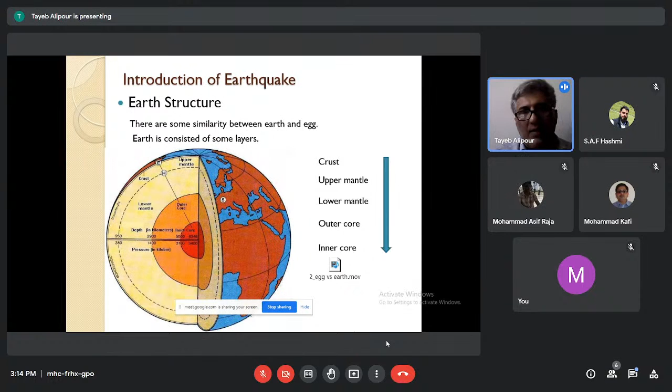In this slide, you can see the layers of the Earth with their materials. As you see, the inner core is solid, the outer core is liquid, then the mantle, and after that the crust. The crust is between the surface and 100 kilometers in thickness. You can see other depths such as solid and liquid layers - for example, 5,100 kilometers solid and 2,900 kilometers liquid. Anyway, this is the basic information.

In this slide, how do lithosphere plates move under the lava? It's simple - as you see, this is a flow under the lithosphere plates. There are two flows, in fact, on the right side and left side, both happening at the same time. When we have this situation, the lithosphere plates experience tension.

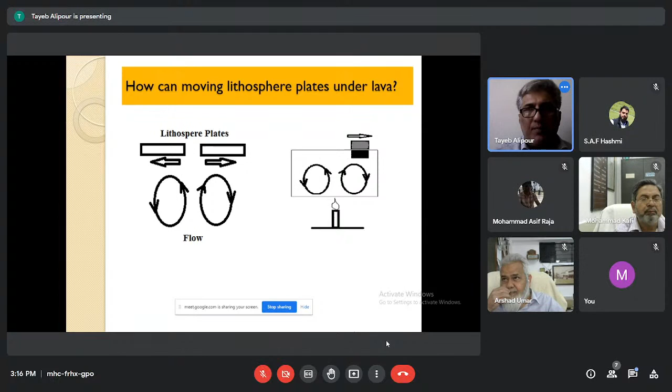In this slide, this is the tectonic plates of the world. As you see on the left side, America and Africa are separate at present, but 200 million years ago, both of them were face to face.

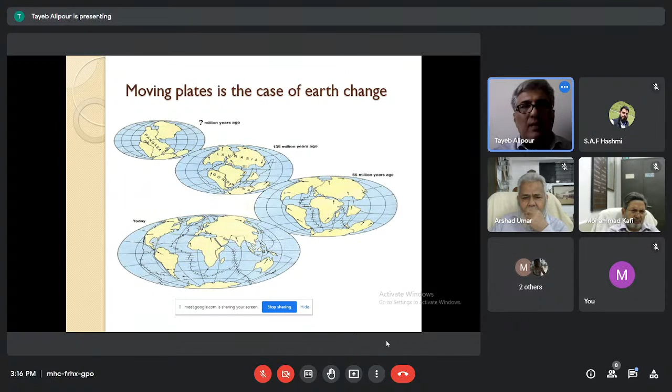Moving plates is the cause of Earth's change. You see on the left side, up to millions of years ago, all the continents were together. After 135 million years ago, there was a little change. After 65 million years ago, on the right side, it is similar to present. And today this is the Earth, as you see.

But what will happen in the next 100 million years? Definitely it will change again because of moving plates. So Earth can change.

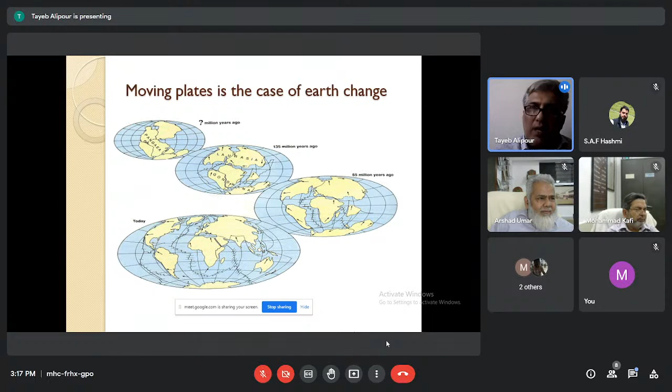So if you focus on Indian plates, it's under pressure.

Background of earthquakes in the world, 1980 to 1990. As you see in this slide, there are main earthquakes in the world during this time. The ring of fire is the main ring of earthquakes around the Pacific. Also, we have Atlantic and Alpide.

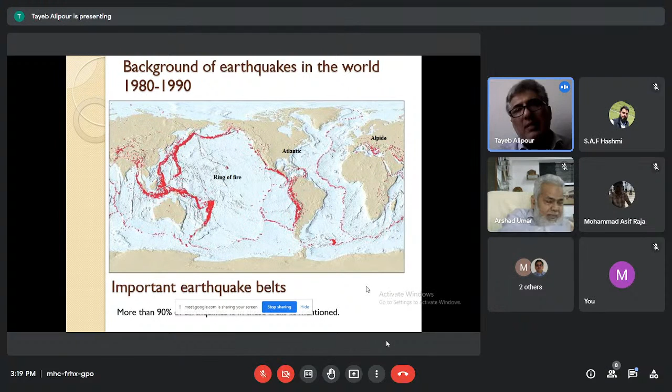In this slide, you can see the direction of Arabian plates towards Iran plates, as I mentioned previously, under pressure. Also, you can see Indian plate, same as Arabian plate, both under pressure. As I mentioned, Indian and Arabian have the same behavior for tectonic plates.

But you see Turkish plates are under tension. It's actual—when you have pressure, you definitely must have tension in order to balance.

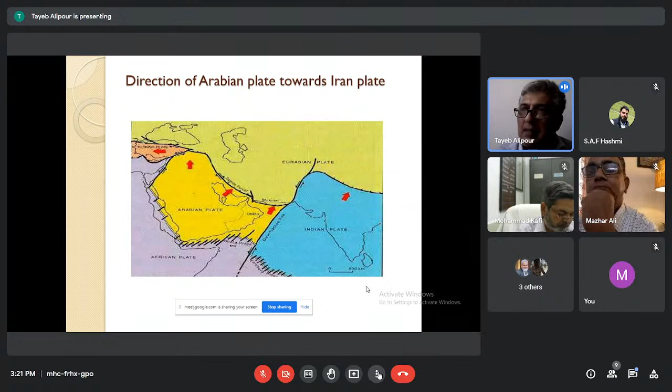Type of boundaries: divergent with extensional behavior, convergent with compressional behavior, and transform with shear behavior. As you see in this slide, left side is divergent and right side is convergent. And after that, transform is possible to see under shear behavior.

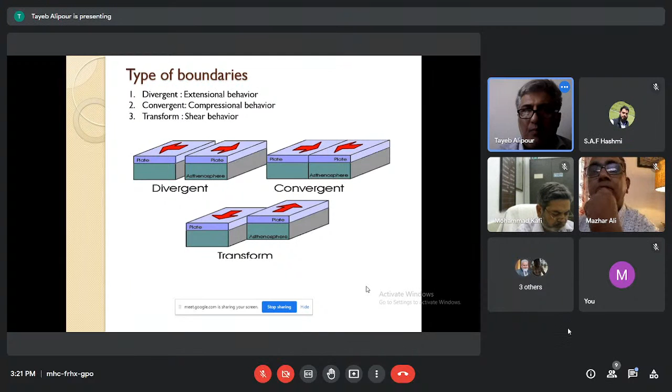There are a lot of movies, but we don't have time because more than 168 slides are possible to present in this time. So I can share this PowerPoint and you can see all of the movies at your home and your university.

Shallow earthquake. As you see, tectonic forces are under tension, and normal faulting you can see in this slide, and transform fault in the ocean. Shallow earthquakes: tension and normal faulting at divergent boundaries, strike-slip at transform faults for lithosphere and other layers.

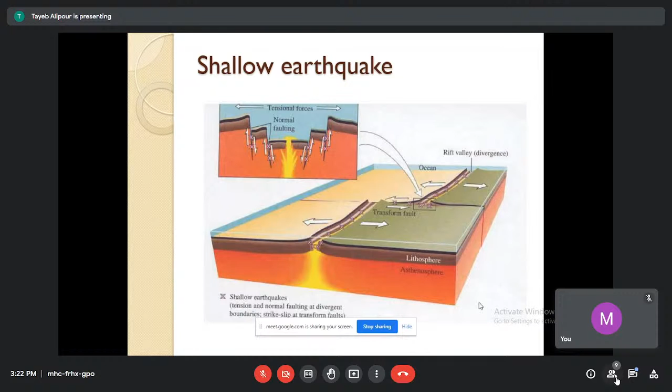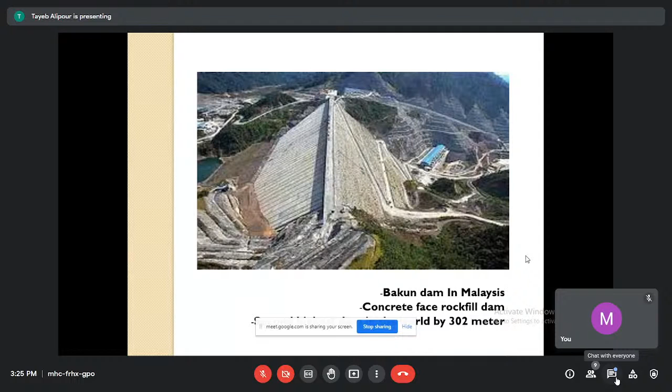In this slide, you can see Bakun Dam in Malaysia. It's a concrete face rockfill dam, and it's the second highest of this type of dam in the world, at 302 meters elevation. It's in Sarawak, Malaysia. And in this area we also have peak ground acceleration, which is under my study, as I got it in 2012.

There are some photos about the failure of earth dams and some cracks, as you see in the next slides.

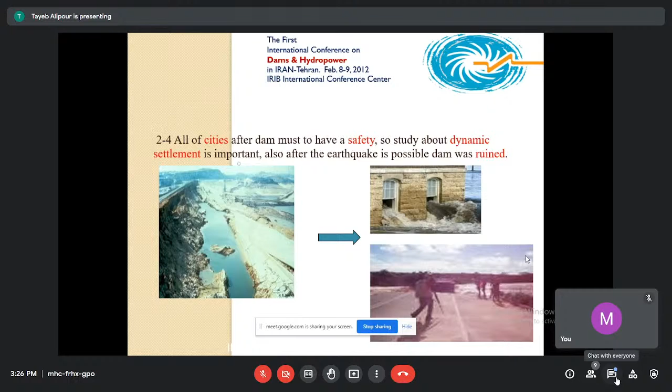This is one example about dynamic analysis, and I use in this study ANSYS software. You can use ANSYS in terms of finite element, or ANSYS Abaqus, and in terms of finite difference, you can use FLAC program also to analyze dynamic analysis of earth dam.

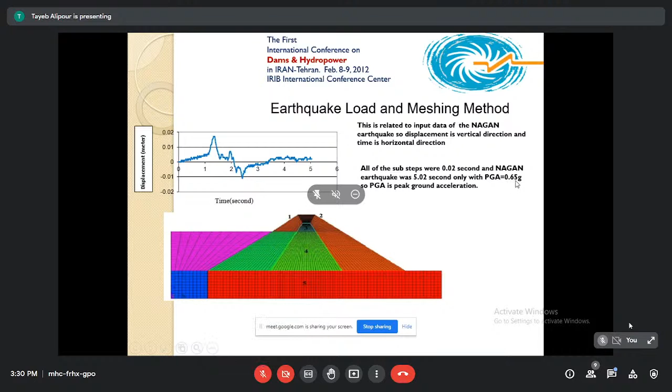Also, observation of performance of a dam during the 2013 Grassmere earthquake. As you see, upstream and downstream, exactly in this area, and at the crest, you can see a lot of long cracks.

Also observation of cracks, next slide. You can see the various damages during head water on the upstream, because this is dynamic pressure and not static pressure. When you focus on dynamic analysis, dynamic pressure of water is so important on the upstream head.

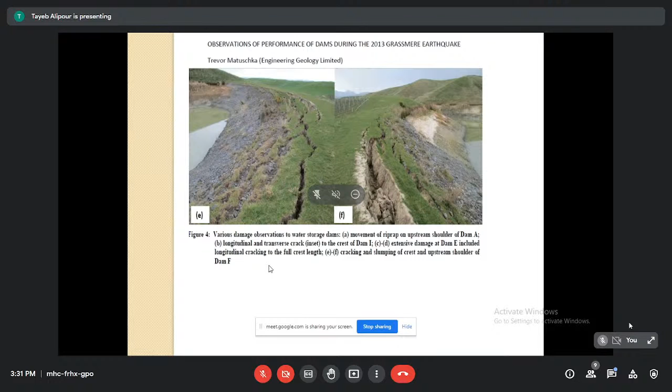You can see here Tappar Dam displayed longitudinal cracks at its upstream during the Bhuj earthquake in India. Lateral spreading zone at the downstream of the Kaswati Dam.

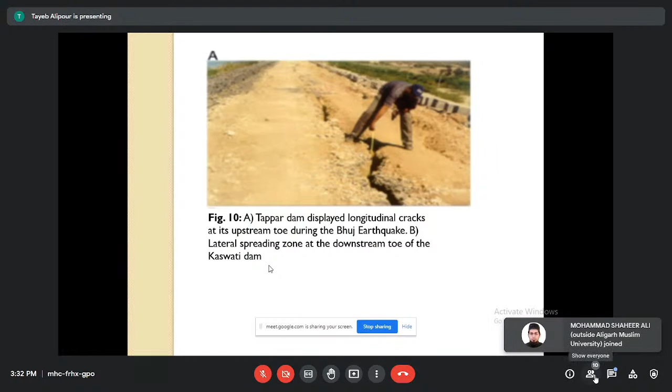Excuse me, do you have my voice? All right, because I was worried there is nothing. Anyways, I will go on.

You can see the concrete slab dislocation, the Zipingpu Dam during the Wenchuan earthquake in China. This is one of the concrete face rockfill dams. After this earthquake, you can see long cracks at the slopes.

You see the settlement exactly at the middle of the crest in the Zipingpu CFRD, as reported by Xu Zeping in 2008.

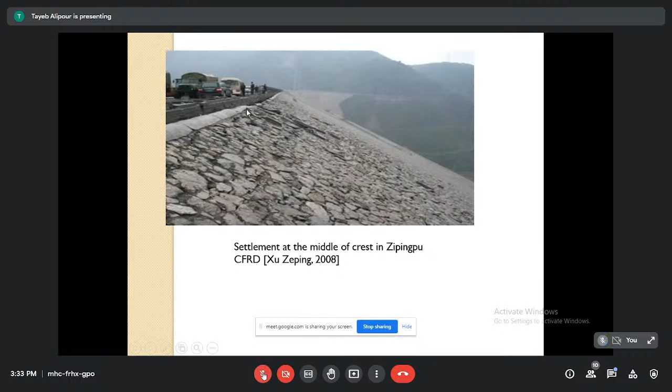Do you see my mouse, Professor Bilal? Yes. Okay, because as you see, this is the middle of the crest, and the settlement is maximum exactly in this area.

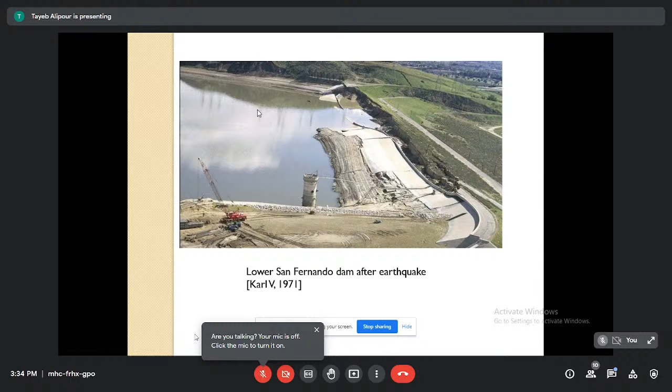So what happened? What should we do? There are some options to select. Just wait and go on, we can explain step by step.

So in Los Angeles Dam, also a concrete face rockfill dam, after the Northridge earthquake in 1994, reported by Robert, there are some cracks.

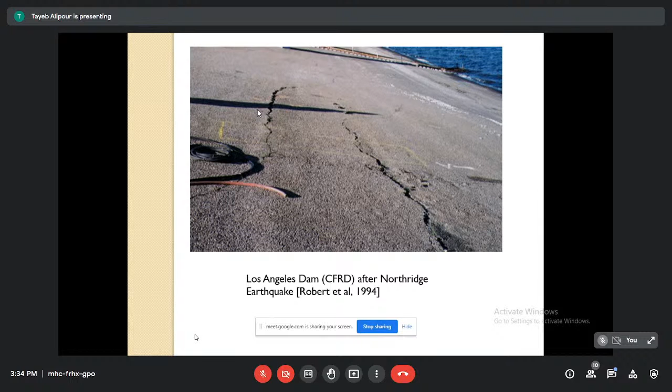Why? Because displacement at the crest is maximum, and shear stress of the soil is 0. Shear stress in an earth dam is maximum at the base, based on soil dynamics and soil mechanics knowledge. Shear stress plays an important role on dam behavior during an earthquake, so when you have minimum shear stress at the crest, it's natural to have cracks and maximum displacement.

As you see in this slide, the cracks are wide, and after that, it's so hard to process a repair. For repair, I will explain next how.

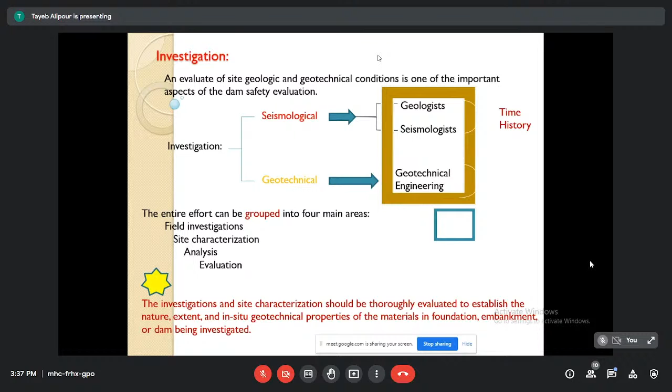Anyways, regarding hydrodynamic effects - to include earthquake-related hydrodynamic effects in stability analysis of water-retaining dams, the hydrodynamic pressure, delta PHD, below reservoir water level may be estimated from the following, Zangar 1952. You can see the formula, and you can see the charts, Y over H, and the pressure coefficient, as you need to calculate delta PHD.

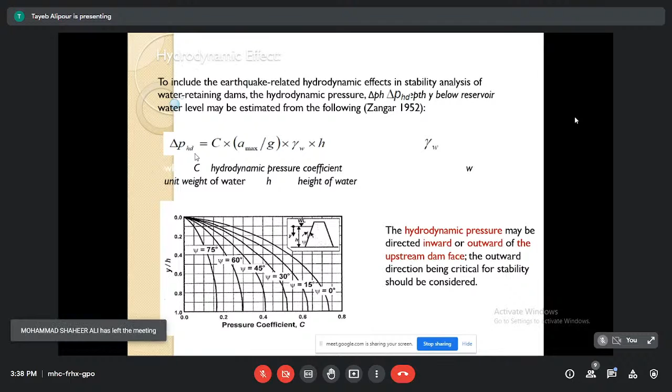The hydrodynamic pressure may be directed inward or outward of the upstream dam face. The outward direction, being critical for stability, should always be considered.

In this slide, you can see the time history analysis of Bakun Dam. As I mentioned, it's in the east of Malaysia, Sarawak. On the right side, there are two maps. The first one is the peak ground acceleration, or PGA, map for 500 years in Malaysia.

This was related to my supervisor, Professor Azlan bin Adnan, because he was an earthquake engineer. He also made, in 2008, a peak ground acceleration map for 2,500 years. So you have three colors here - green, red, and blue - with different PGA values.

This is the Bakun Dam in the middle, and this is the meshing of the concrete face rockfill dam. This is the aggregate rockfill, and the face is concrete, and this one is water.

So when you want to model this type of dam, you must be careful about the interface between the rockfill material and concrete, and between the concrete and water. You need to make interaction effects.

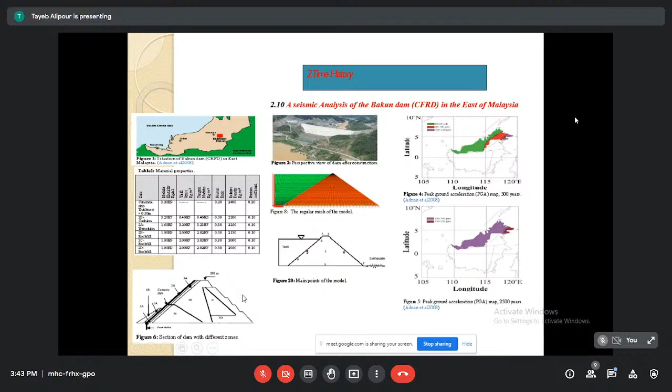For time history analysis, I used 3 records - figures 9, 10, and 11 - with different time and different peak ground acceleration. I used 3 earthquakes.

So you can see at different key points horizontal displacement and vertical displacement, and shear stress and shear strain, in order to consider the behavior of the dam during an earthquake.

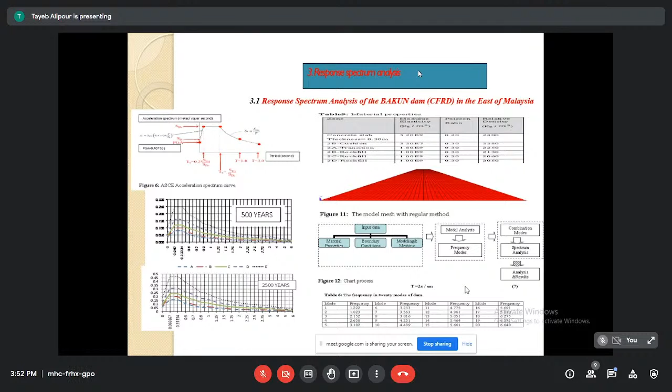Very good slides. Do you have my voice? Sorry, because I worry sometimes. Mr. Balal, do you have my voice? Yes, Professor, it is available. All right, thank you so much.

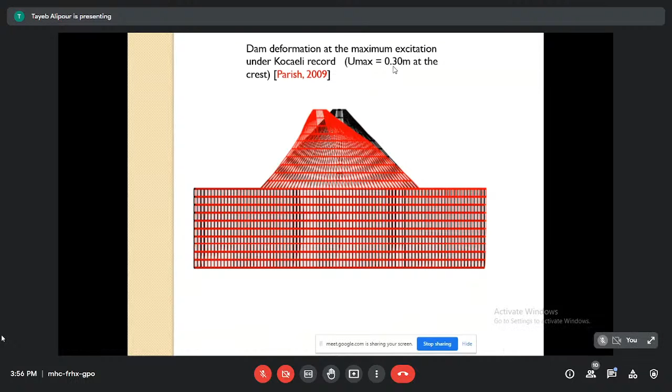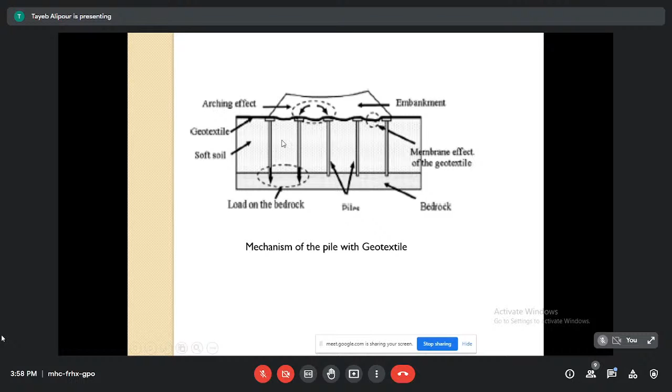Also you can see cases of the shaking table test as used for small scale modeling by Matsumaru 2008. For small scale modeling, you need to have a shaking table or centrifuge device. For my PhD at University Technology Malaysia, I used shaking table test for small scale modeling. Next, I'll explain a little about my method to remove these cracks at the crest and upstream during an earthquake by using the IDL material. What is the IDL? I'll explain in the next 2 or 3 minutes, maybe next slides.

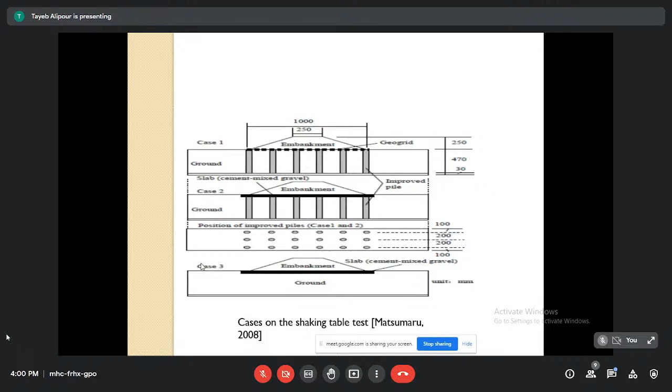Generally damaged. Anyways, these are some examples to show you, and you can see the primary centrifuge test, Wang 2011. Also I had one supervisor, Professor Dr. Rajiv Kumar from India, 2010.

Unfortunately, I lost contact with him because his contract finished at UTM, and after that I worked under Professor Azlan bin Adnan in UTM. I have no contact with him because he's not on Instagram, not on LinkedIn, not on ResearchGate, and I just have a connection by mailbox, and the last mail was 4 years ago. I am so worried about him. He was very good, very good - he had 2 postdoctorates, one in Korea and second in United Kingdom, Leeds University I think.

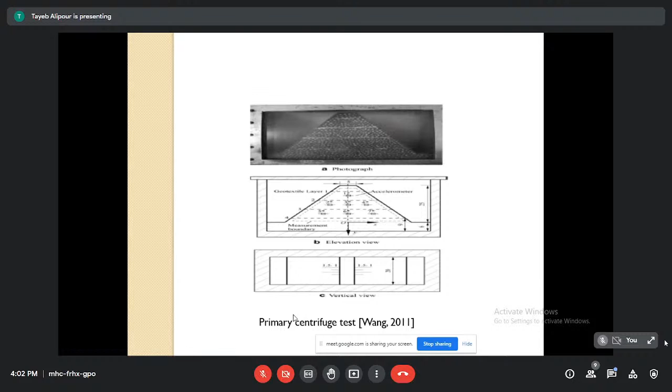earthquake. So I put this slide because I want to explain that when you want to focus on dynamic analysis of earthquake, you must focus on what time earthquake is occurred on the dam: during the construction, after the construction, the first reservoir, and after consolidation. Maybe 20 years after dam is constructed, you have earthquake. What's happened? Definitely your dam is consolidated, and this condition should be put in your model.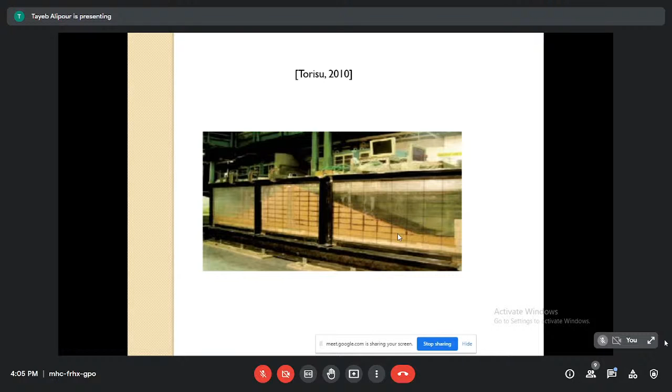Based on your option, you must put input data inside the software program. Please be careful about that.

And you see some shaking table test here. After the formation, you see the C condition, D condition, A and B.

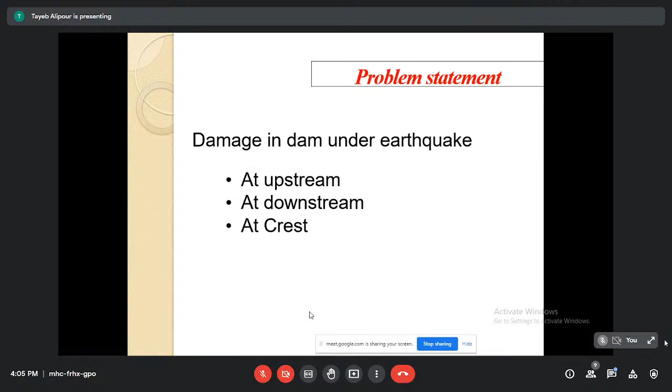Damage in dam under earthquake is a problem statement, and it's possible - damage is possible at upstream, downstream, and crest. Based on the literature review, there are some main notable words I want to share with you.

Acceleration is maximum at the crest. Maximum settlement is in the middle of the crest. Interface is very important for analysis. The amplification procedure related to the soil properties is very important - in fact, this is site response effect. And the valley shape affects dynamic analysis 2D or 3D.

So valley shape is so important. When you have U shape, it's better to make earth dam because you can use 2D conditions. And when you focus on 2D conditions, it's so simple for your PC to solve the problem by finite element. When you have 3D conditions, it takes a time.

Maybe you must use a huge PC to solve this problem. But when you need to use 3D, when your valley shape is V shape, in fact this is 3D. But when we have V shape, generally we focus on concrete dam, not earth dam. When we have U shape, river is U shape, so it's better to make an earth dam because of economic reasons - soil is so cheaper than concrete, as you know. So for earth dam, if we have U shape, it's 2D, and if we have V shape for river, we must use 3D analysis.

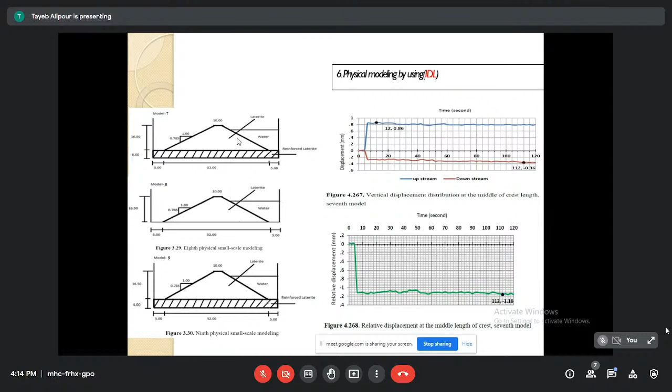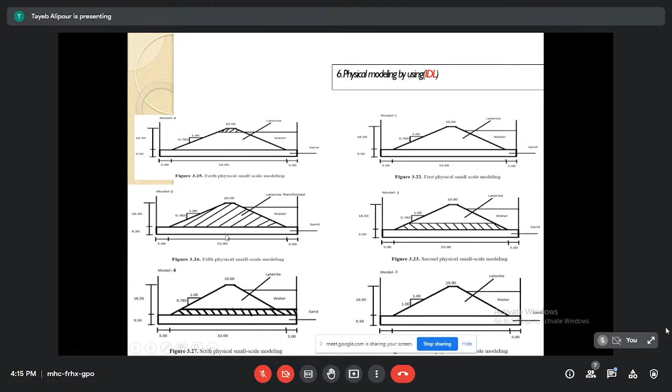Also I used different models. For example, in this slide you can see all of the body used IDL, but it was not good in terms of results because I had cracks again. As I mentioned, model 6 was the best result.

Anyways, after all, I think I have just 30 minutes, maybe 40 minutes, am I right? Yes, yes. I must finish and go very soon because I have a lot to cover.

This time I want to focus on guidelines for seismic design of earth dams and embankments. It's for India, exactly, GSDMA, which you can download. I recommend you read it carefully, step by step. This criteria is one of the best in the world.

So you can see the general scope. This criteria is related to the Gujarat State Disaster Management Authority, August 2005, revised May 2007, and reviewed by ICOLD, the International Commission on Large Dams. It consists of guidelines for earth dams built with small to moderate size embankments according to Indian codes, IS 11223-1985.

Defensive design measures, as you see highlighted in red because I had no time, it's possible for you to download and read it carefully. Deformation, overtopping, cracking, filter materials are so important for design. Filter materials, filter layers, near-vertical chimney drains are very important, and minimizing saturation of materials is important.

Wide impervious cores for plastic deformation, well-graded core and uniformly graded filter materials are important. Large slides into the reservoir are important; stabilization of reservoir rim slopes to provide safety against large slides into the reservoir. Ground improvement or removal and replacement of foundation material, as I mentioned, to mitigate liquefaction potential is so important. Stabilization of slopes adjacent to operating facilities to prevent blockage from slides associated with earthquake and flooding. All of these are important.

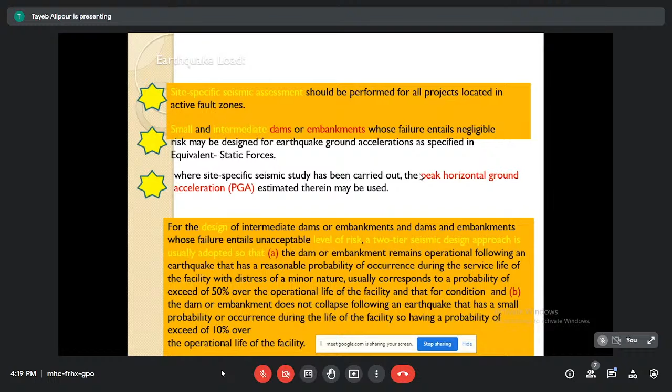Also, about site-specific seismic assessment: small and intermediate dams or embankments, and peak horizontal ground acceleration. You can find a lot of good information in this criteria. This slide is repeated, I think I explained it last time.

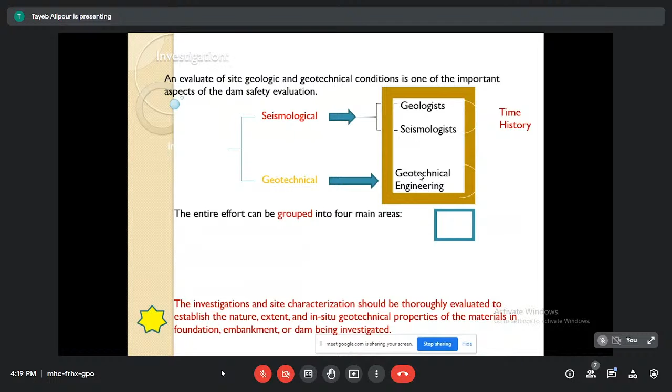Surely, geotechnical engineering investigation should focus on topics including topographic conditions, description of geology, composition and structure of foundation soils from the borrow area and bedrock, principal engineering properties of the rock and soils including grain characteristics, plasticity, compaction, characteristic shear strength, and hydraulic properties. Geotechnical investigation would typically include drilling and sampling, in-situ testing, SPT and CPT.

About location, this structure should not be constructed near the fault. In fact, near the fault, it's so important - you must avoid constructing earthen dams near the fault. If you want to proceed, you must improve your soil by different options, as I mentioned: using geotextile in different layers to increase damping, using piles with caps to absorb energy before it transfers to the dam body. So you can use different options, but this criteria tells you that this structure should not be constructed near the fault. Near field earthquake is when you have a hypocenter, the main point releasing energy of the earthquake, and this point has a distance from the surface. If this distance is less than 15 kilometers, it means near field earthquake. So when you have a near field earthquake, or near the fault, you must avoid constructing the earth dam.

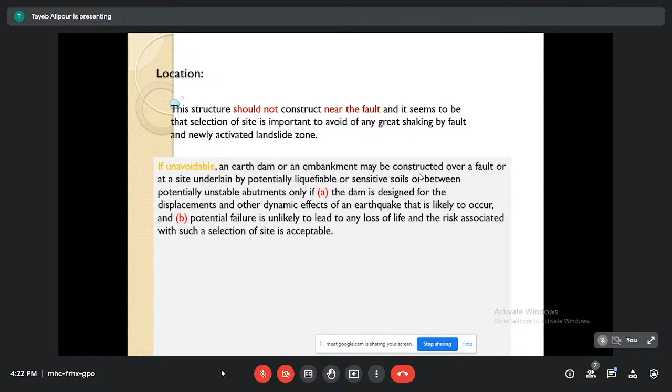About liquefaction, it's so important. Liquefaction leads to loss of strength and increase in settlement. Moderate to large earthquakes increase pore water pressure build up, for sandy soil exactly, and sensitive clay soil also. After that, effective stress leads to zero, loss of strength, and increase of settlement. In fact, tau is equal to C plus sigma tangent phi, the Mohr-Coulomb formulation in soil mechanics. When you have liquefaction, you have less shear stress.

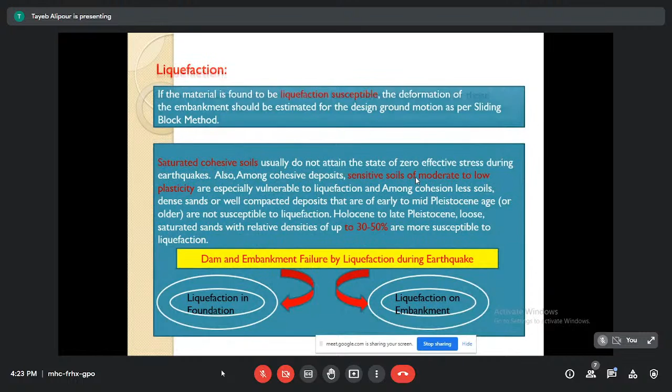And you can see about liquefaction, there are some slides on embankment failures. I have some better slides next, so I prefer to move on because I have no time.

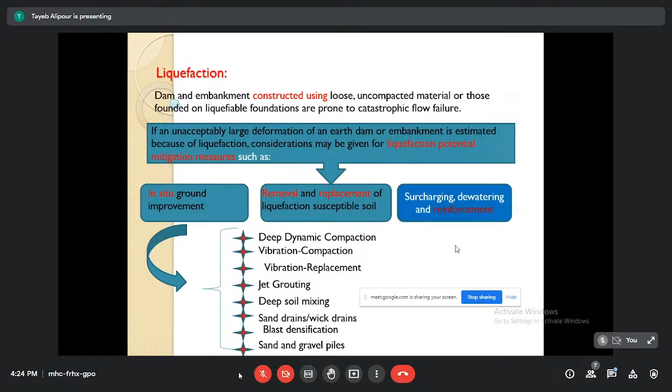What about compaction? For cohesion-less soils, a relative density of 80% may be used as an alternative indicator of the minimum compaction requirement. It's so important. Totally, when you have very good, accurate compaction, during a moderate earthquake - I think moderate, not strong - when you have good compaction, I think you have no problem during an earthquake, moderate or small earthquake.

But about resonance condition, definitely in moderate PGA and small PGA, but with the same frequency for both earthquake and dam, definitely you have a problem. As I mentioned, resonance condition is very strong in dam analysis during an earthquake.

Anyway, seismic slope stability assessment: you can see cyclic stress induced by earthquake shaking, the cyclic stress strain behavior of the material within the body of the dam or embankment, and foundation soils. Types of methods include equivalent static stability analysis, sliding block method, and dynamic analysis, simplified or rigorous, which you can use for the maximum cross section of the dam.

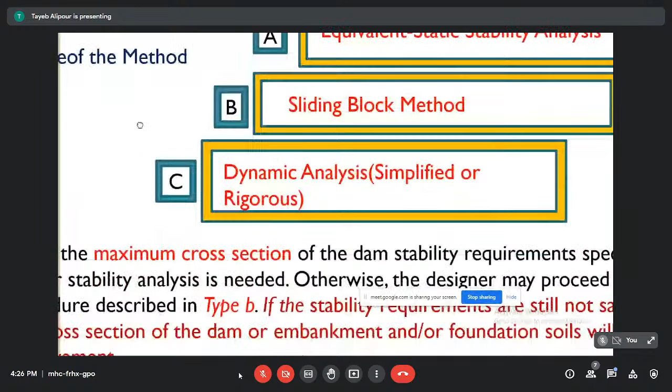All right, just a moment, I want to move it here. When the maximum cross section of the dam stability requirements are specified in Type A, no further stability analysis is needed. Otherwise, the designer may proceed to the procedure described in Type B. If the stability requirements are still not satisfied, the cross section of the dam or embankment and/or foundation soils will require improvement.

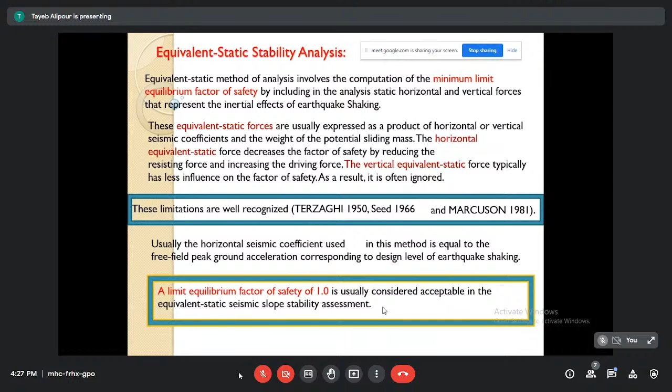You can see Type A, B, and C methods here. For equivalent static stability analysis, a limit equilibrium factor of safety of 1 is usually considered acceptable in the equivalent static seismic slope stability assessment. But I prefer to recommend 1.2 is better, because with a factor of 1 there may be some errors during construction in terms of compaction and other options. So it's better to use 1.2 for the safety factor.

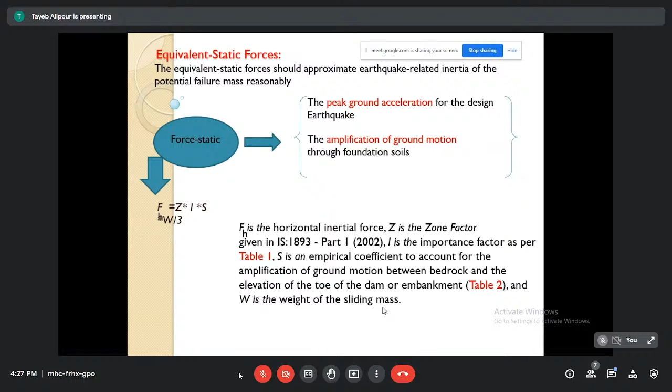Also, you can use equivalent static forces, forces related to peak ground acceleration and amplification of ground motion. You can use Table 1 and 2, both possible in this criteria to use.

Also, about application of forces, soil properties are very, very important, since earthquake loading is rapid. Stability for an earthen dam or embankment is usually considered under undrained condition. Soil properties used in analysis should reflect softening because of pore water pressure generation and strain development, and cyclic strength degradation.

Consolidated undrained strength parameters should ideally be obtained from simple shear testing of undisturbed samples carried out in the laboratory, and you can use CPT and SPT tests. The undrained shear strength for cohesive soils is estimated using field vane shear test or other appropriate methods. If the dam foundation is underlain by sensitive clay soils, residual undrained shear strength should be used for undrained stability assessment.

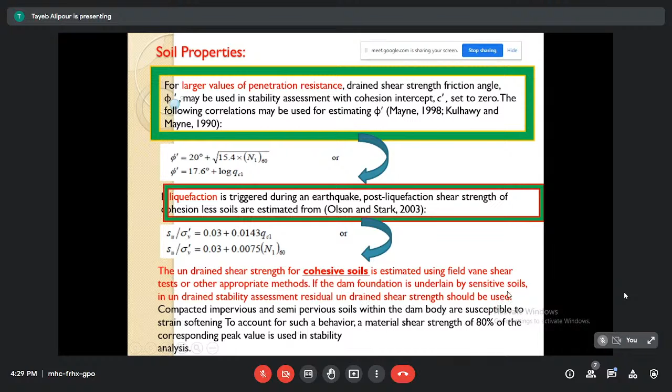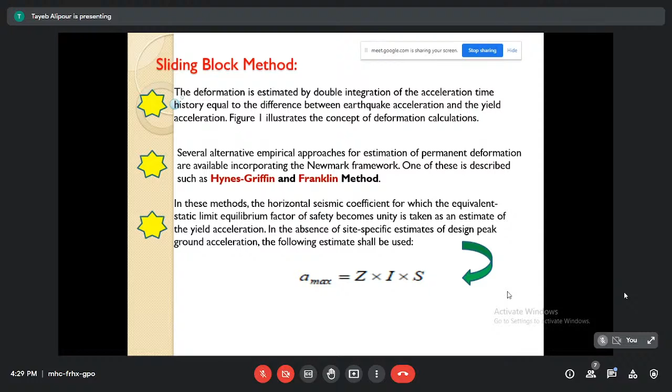Other notes: sliding block methods based on Newmark sliding. When you go to GeoStudio for slope stability in static or dynamic conditions, you use Newmark sliding. It's a very good and simple software for trial and error slope stability analysis, which I mostly used. Sliding block methods can also be defined based on Hynes-Griffin and Franklin methods.

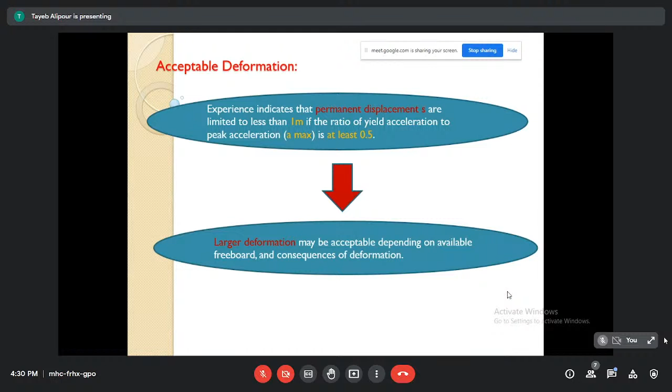What about acceptable deformation? Experience indicates that permanent displacements are limited to less than 1 meter if the ratio of yield acceleration to peak acceleration Amax is at least 0.5. Large deformation may be acceptable depending on available freeboard and the consequences of deformation. You can also use the Hynes-Griffin and Franklin method for peak horizontal ground acceleration.

Dynamic analysis employing a nonlinear stress-strain relationship provides a rational framework for estimation of deformation of an earth dam or embankment. There are six steps for dynamic analysis based on Seed 1979 and Finn 1986, steps 1 through 6.

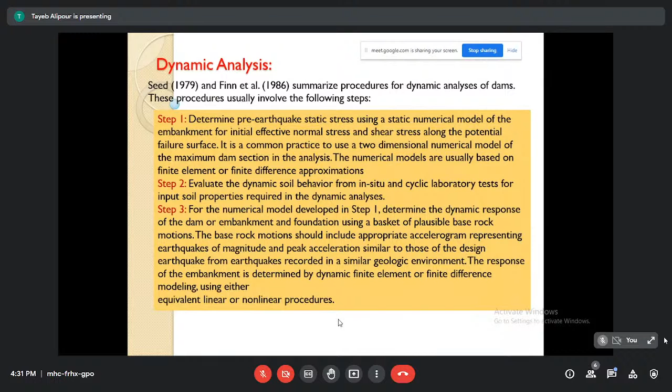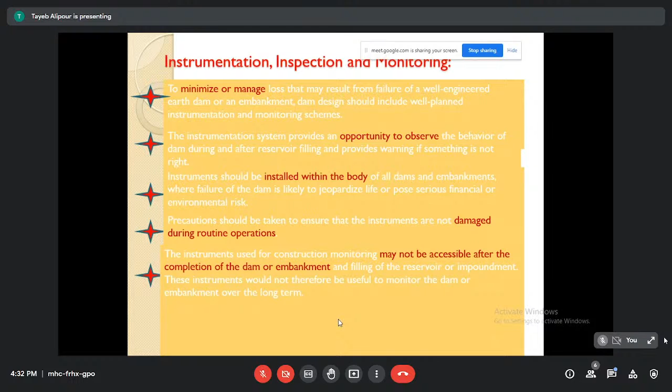I have no time because I have some slides, so I prefer to go on and you can read because it's so simple. Also, hydrodynamic effects, instrumentation, inspection, and monitoring are very important for a dam. All of them are important and should be done.

About inspection: an embankment or dam should be inspected once every year and/or after the occurrence of an earthquake of magnitude 5 or above with an estimated free field peak horizontal ground acceleration of 0.1g or more at the dam site. The inspection team should include a qualified geotechnical engineer and a surveyor with adequate experience in dam safety monitoring and visual inspection.

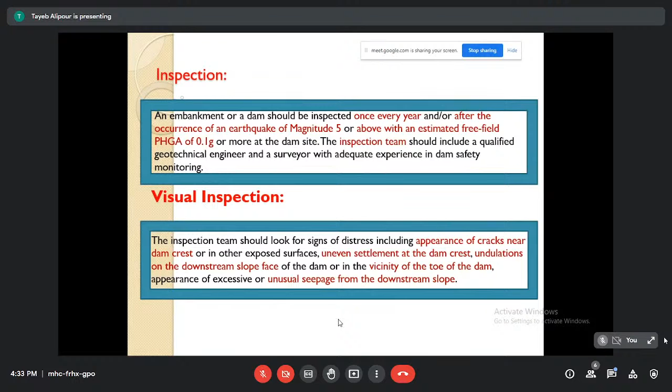The inspection team should look for signs of distress, including appearance of cracks near the dam crest or other exposed surfaces, uneven settlement at the dam crest, undulations on the downstream slope face of the dam or near the toe, and appearance of excessive or unusual seepage from the downstream slope. All of these should be checked.

Monitoring of instrumentation and surveying monuments should include the following: serviceability, whether instruments are in working order with appropriate calibration; measurement of permanent deformation using measuring devices; checking whether there is any unusual fluctuation of seepage rate since previous monitoring; and readings on a prescribed schedule with data carefully evaluated by a qualified engineer.

A record of all inspection routines should be maintained in prescribed format. Reports from prior inspection and monitoring activities should be available to the inspection team at the site during fieldwork. Any unusual observation should be communicated to the dam authority and to the regulatory authorities by the inspection team as soon as those observations become available.

So for the final part, I have some studies, maybe 10 or 15 minutes. The relation between material property of foundation and dynamic settlement in the earth dam - I want to explain a little bit about this study.

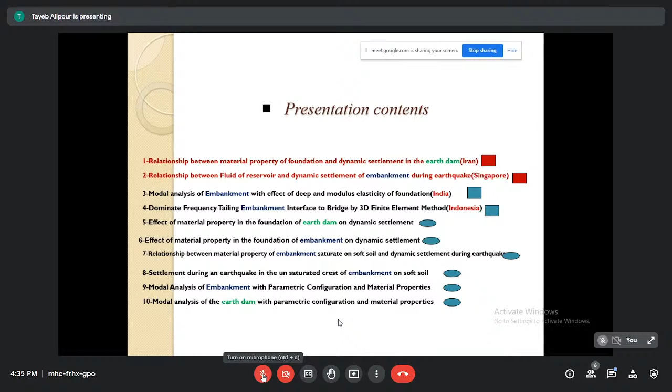There are about 10 studies shown in this next slide: relation between material property of foundation and dynamic settlement in the earth dam, as presented in the Iran conference; relationship between fluid of reservoir and dynamic settlement of embankment during an earthquake, Singapore conference; modal analysis of embankment with effect of depth and modulus of elasticity of foundation in India; dominant frequency of tailing embankment interface using 3D finite element methods in Indonesia; and other studies as you can see here.

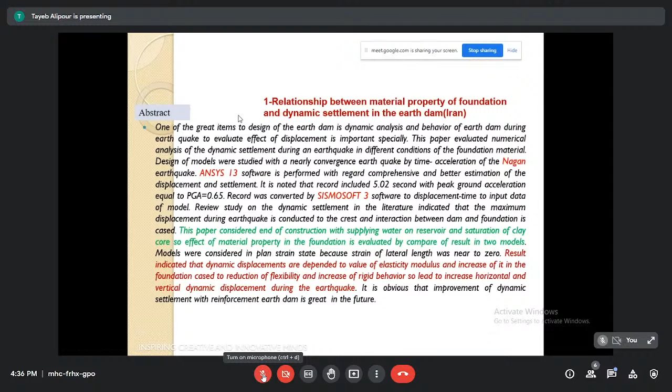So I'll explain some conclusions about these studies, as recently investigated. The first one: relationship between material property of foundation and dynamic settlement in earth dams. I'll focus on the conclusion here - effect of foundation properties on the embankment in the dynamic analysis were evaluated in this study.

Dynamic displacement depends on the value of elasticity modulus. An increase in it in the foundation leads to reduction of flexibility and increase of rigid behavior, leading to increase in horizontal and vertical dynamic displacement during the earthquake. The numerical analysis had good agreement with the literature review. Attention to improvement with reinforcement of earth dams is very important in the future.

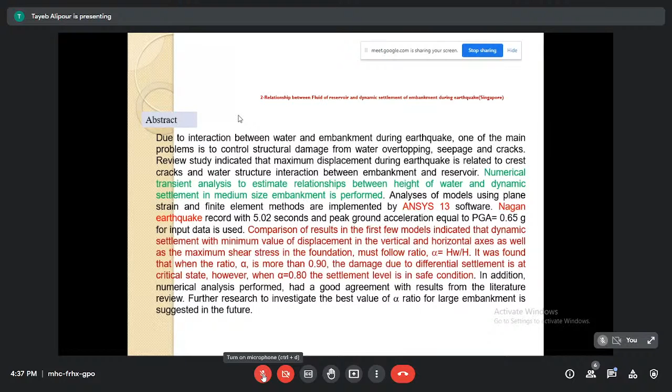Another study looks at the relationship between fluid of the reservoir and dynamic settlement of the embankment during an earthquake. I explained the abstract and model.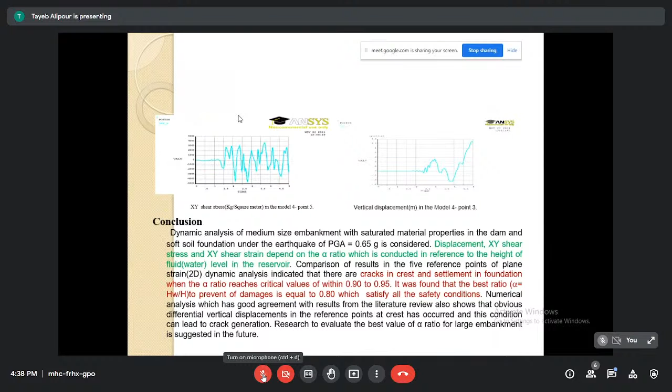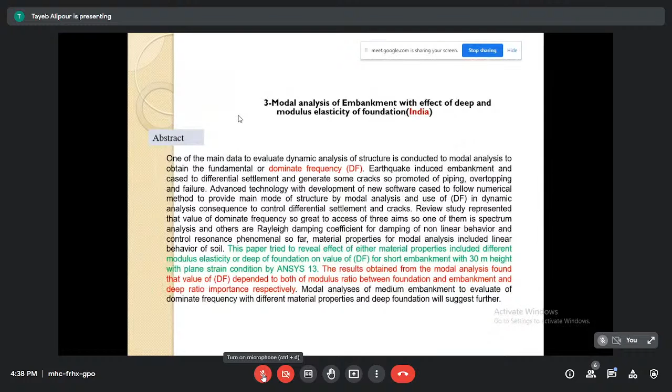In fact, this study is related to the freeboard. So I suggest that 80% of the height of the dam is good, and 20% is good for freeboard during the dynamic analysis. In another study, modal analysis investigates both the frequency of the embankment with the effect of deep and modulus elasticity of the foundation.

You can see in these slides mode shapes number 1, number 2, number 3, and number 4 of one earth dam during an earthquake. You see the vibration.

So what is the dominant frequency? That is the big question. When you analyze, the dominant frequency is the minimum frequency among the mode shapes. When you perform free vibration analysis, as I mentioned previously, you have n modes, so you have n mode shapes. When you make a mesh with n modes, it means you have n mode shapes. Which one is the dominant frequency?

Mostly the first mode or second mode is the dominant frequency with the minimum frequency, because the minimum frequency leads to the highest and maximum period, based on earthquake engineering knowledge.

In conclusion, modal analysis of the earth embankment was performed by finite element and plane strain 2D to evaluate the effect of modulus ratio and deep of foundation ratio on the value of dominant frequency. Results indicated that the value of frequency was minimum and critical for resonance in the modal analysis, for all models, as the dominant frequency.

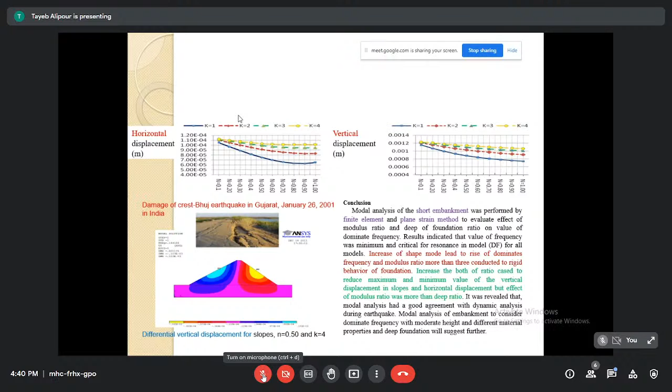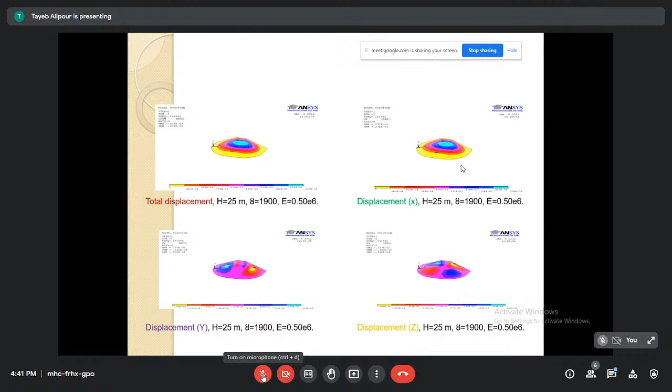Another study looks at dominant frequency again, for a bridge-connected dam. In fact, as you see, there are 2 embankments and between them is a bridge, similar to London Bridge. This study was done for this conference, and you can see all of the mode shapes and distribution of shear strength, shear stress, and vertical and horizontal displacement, which was done using ANSYS, and you can see the results.

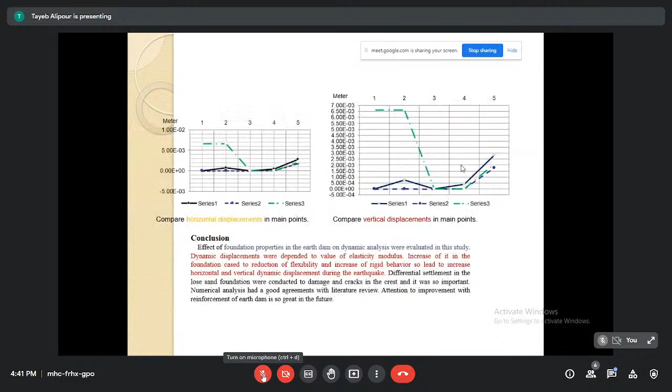The effect of material properties for dynamic conditions was also investigated, and you can see all of that. I'm looking for one very important slide.

About Poisson's ratio: when you focus on dynamic analysis, you must input correct data to the software. When you input bad data to the software, you will exactly get bad output data in your analysis. So I recommend you to be very careful about Poisson's ratio.

Poisson's ratio for saturated soil is higher than for unsaturated soil. Please be careful about that. For example, for saturated clay, based on the literature, Poisson's ratio is between 0.45 to 0.49. The maximum Poisson's ratio is 0.5. I think water has the maximum Poisson's ratio.

So please be careful about input data, exactly about elasticity modulus, tangent modulus, yield stress, friction coefficient in terms of interface and interaction effects, and also Poisson's ratio. You must use each of them exactly and correctly.

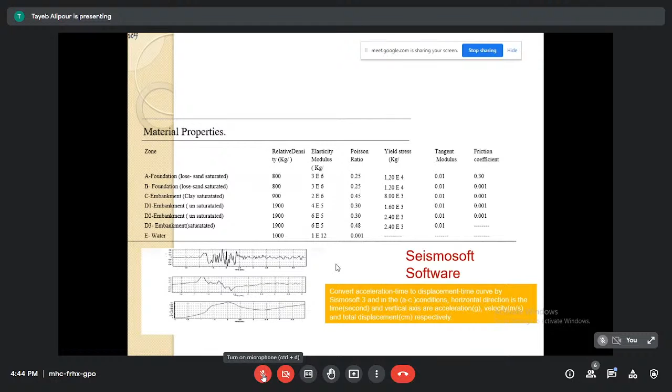In fact, you can convert displacement time to velocity time or acceleration time. And also you can change the acceleration time to velocity time and displacement time reversely. So all of them are possible to see. I'm so sorry because I have no time.

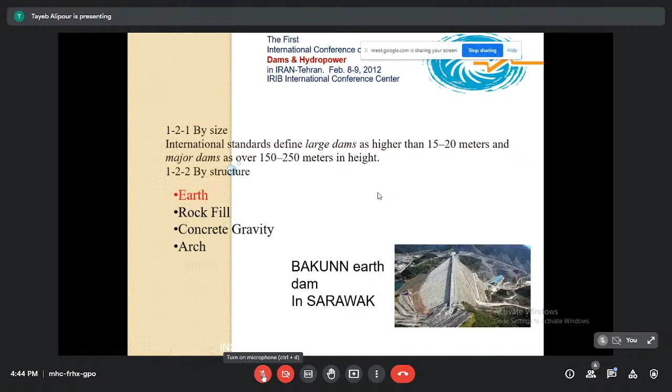You can see, so this is Bakun Earth Dam in Sarawak, as I explained you. Oh, sorry.

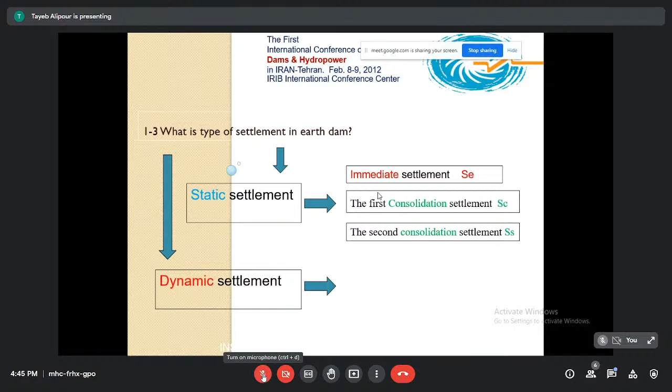This slide is very important. What is the type of settlement in Earth Dam? Static settlement and dynamic settlement. Static settlement is immediate settlement for sand soils, and first and second consolidation for clay soil. Dynamic settlement is possible, but needs sensor instruments, shaking table, and software analysis to calculate.

Failure mechanism of earth dam is also so important. Overtopping, piping, and structural failure are so important in failure mechanism of a dam. Earthquake loading may trigger any of the above failure modes or their combinations.

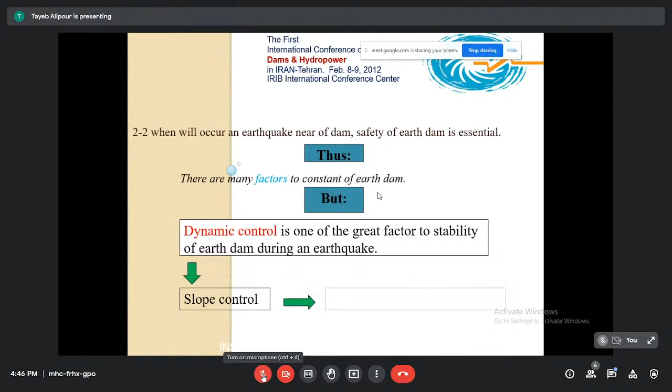So for dynamic control, slope control is so important regarding settlement dynamic factors. Operational life of the dam or embankment is usually 50 to 100 years. Research study to get records of a special situation to build an earth dam is essential. The first step of design earthquake should pay attention to geotechnical study and earthquake background of the site, or to be near to the fault.

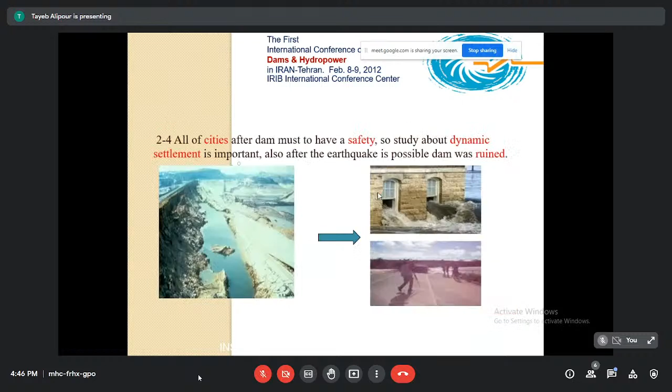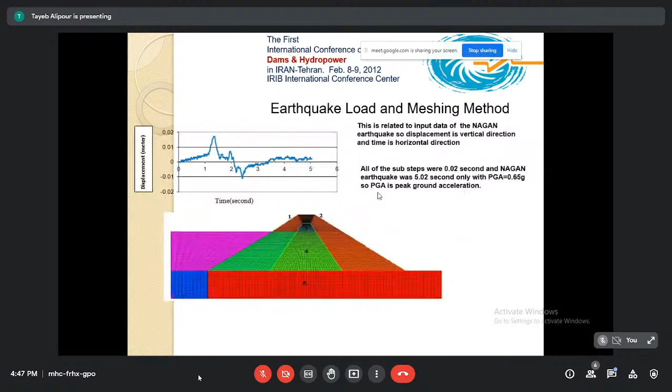And so we have no time. Oh yes, that's the conclusion. So before that conclusion, I want to share you just this important point, 1 minute. If you want to go to dynamic analysis, you need a good chart.

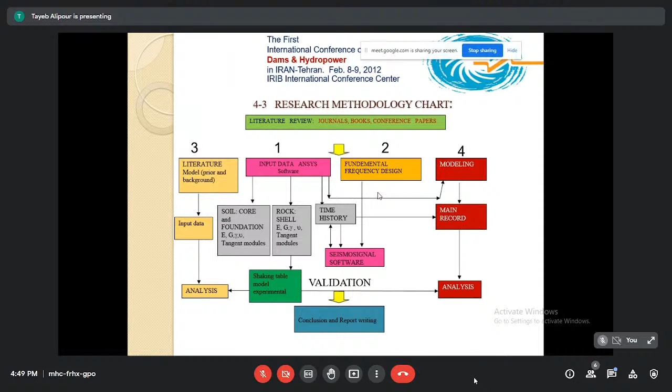It's final, I have no more slides. Thank you for your attention, and thank you for making a good opportunity to share knowledge. Thank you, Algiers Polytechnic University, for listening to me.

Sorry, your voice is so weak. A little bit more, please. Again, repeat.